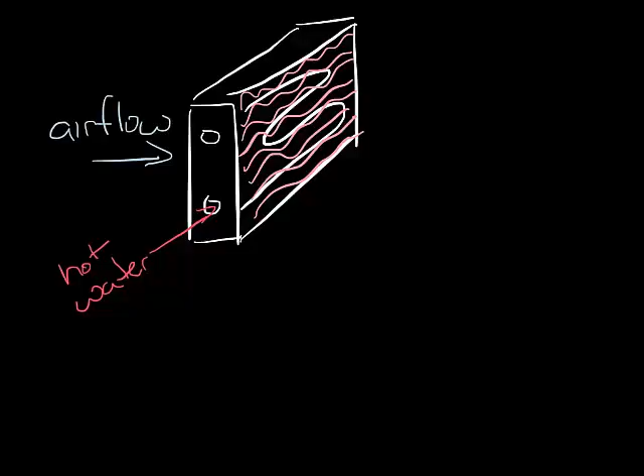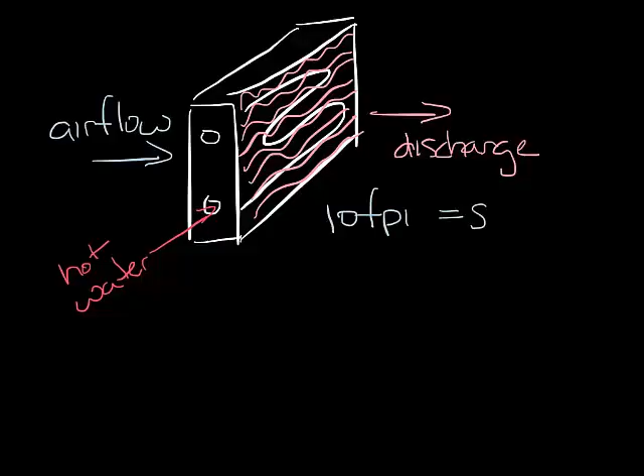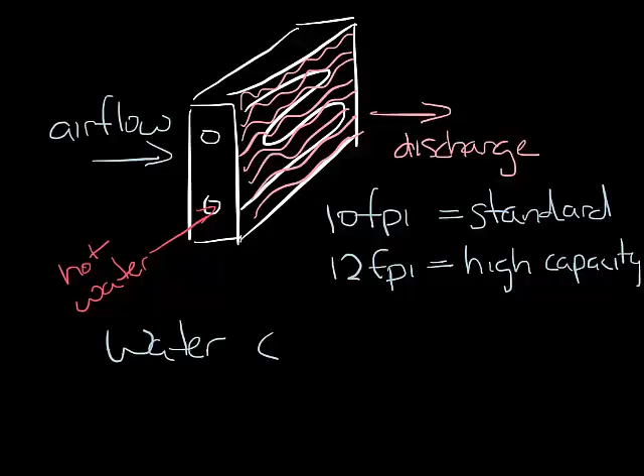Standard hot water coils have 10 fins per inch, but you can also get high capacity coils that are 12 fins per inch. One thing to remember, water coils will add pressure drop to your VAV boxes.

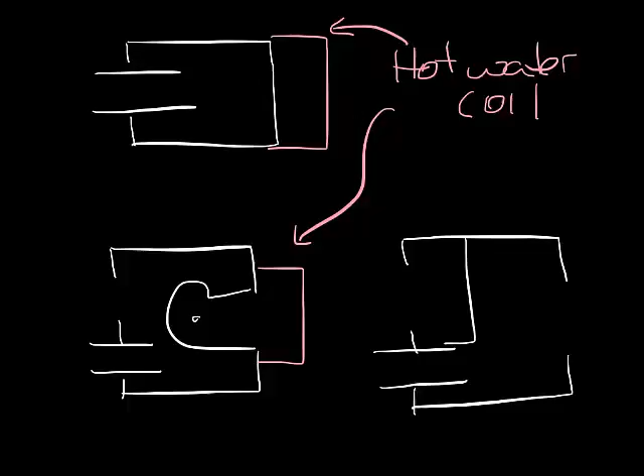Okay, so let's move this out of the way and talk about where water coils are mounted. Water coils are typically mounted on the discharge of a single duct box or a series fan powered box. On a parallel fan powered box, they're often mounted on the induced air inlet so that you don't have a pressure drop across the box when you are not in heating mode.

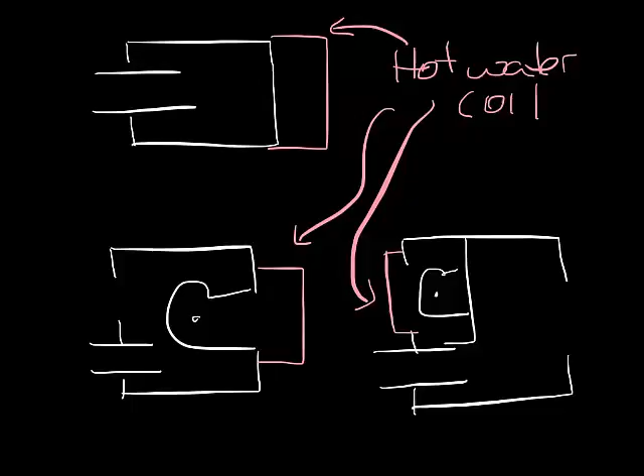Okay, so let's move this out of the way a little bit. When you have a call for heat, the controller on the VAV box modulates a valve that controls the water flow to the water coil, and this is how you control the heat in the zone.

Electric heaters are almost always mounted on the discharge of the box and usually have an air-proving switch because you have to have airflow across the elements or the elements will burn up. Okay, so let's move this out of the way. There are two types of electric heater, staged and SCR.

Staged heat turns the heat on in stages, usually 1, 2, or 3 stages. A single stage heater turns all the heat on at the same time when the thermostat calls for heat in the space. A two-stage heater turns half the heat on in the first stage, and if that doesn't provide enough heat to make the space comfortable, it turns on the second stage. And a three-stage heater does the same thing, but in 3 equal stages of heat.

So let's look at the operation of a staged heater. Say you have a 10 kW heater that's 2 stages, so each are 5 kW. So the first stage gives you 5 kW of heat, the second stage gives you 10 kW of heat, and say your set point is 75 degrees. So let's look at how it operates over the course of a day.

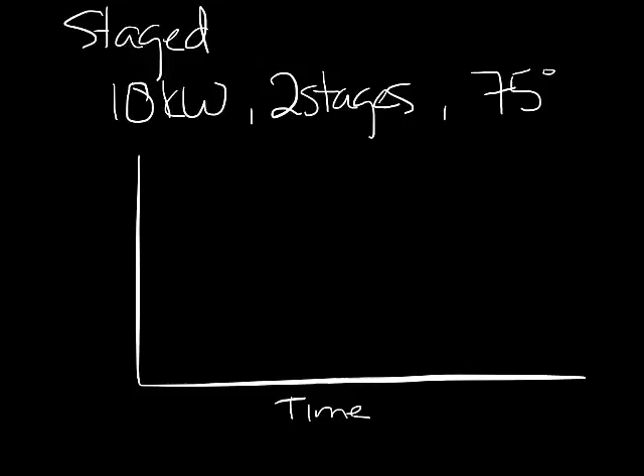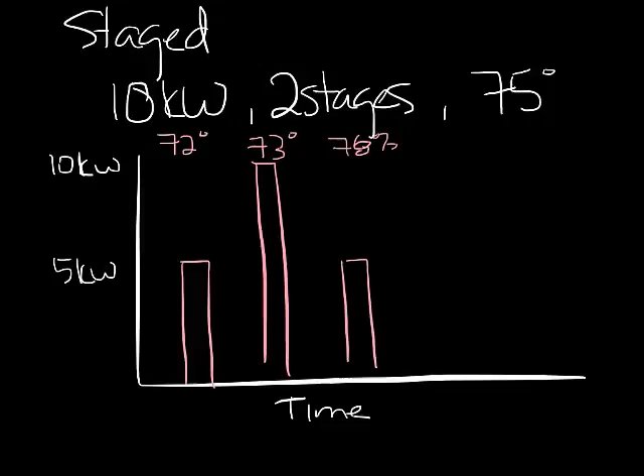So when you come in the morning, your zone is 72, you energize the first stage of heat, which gives you 5 kW, and after a while it's still not comfortable, say it gets to 73 degrees. So you turn on the second stage and now you have 10 kW of heat on. And then it gets too warm, so now it's, say, 78 degrees. So it turns off that second stage of heat and you have 5 kW, but then it gets too cold again, so it wants to turn the heat back on. You turn the second stage on, now it's too warm, and you turn the second stage off, and so on.

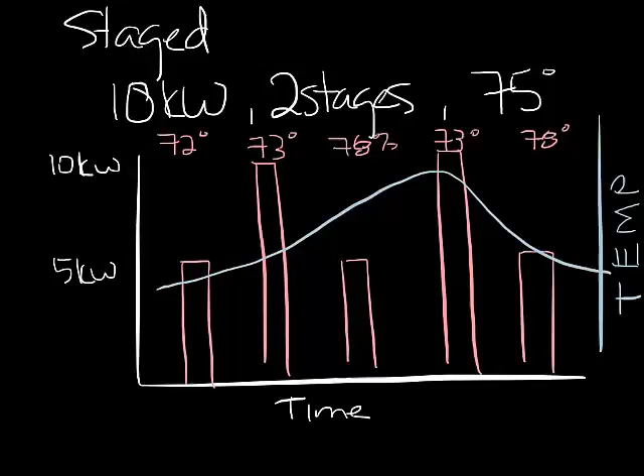If you look at the temperature throughout the space, you go from being a little cold to a little warm to a little cold on and off all day long. And that is the challenge to staged electric heat, because the temperature in the space is going up and down as the system tries to maintain the 75 degrees, but you're too warm sometimes and too cold at others.

So let's move this out of the way so we can talk about SCR electric heat. SCR stands for Silicon Controlled Rectifier. SCR heaters actually don't use SCRs anymore. They actually use SSRs, solid state relays, but the name has stuck around, so we still call them SCR heaters.

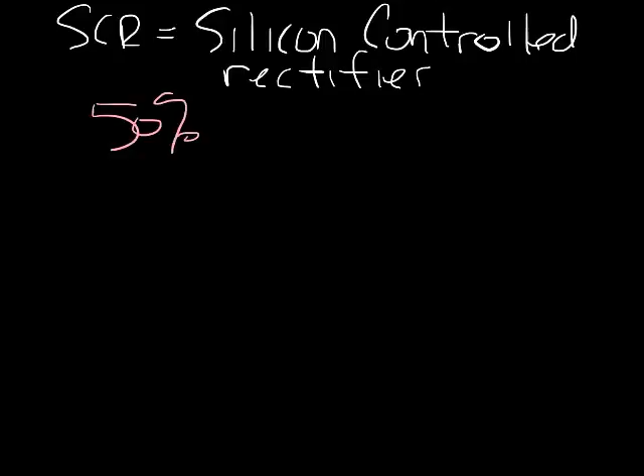The SCR heater solves the problem of overheating and underheating by matching the heat requirement of the space. The SCR heater pulses the heater on and off over a set period of time, usually a couple seconds, to provide the exact amount of heat needed. For instance, if 50% heat is needed to meet the set point, then the heater will pulse on for half the duration and off the other half. So for a 2-second duration, that would be 1 second on and 1 second off.

So let's go back to our 10 kW heater. So instead of having 5 kW on or 10 kW on, you would have the equivalent of 7.5 kW heat output, which would match the needs of the space. And you don't have the overheating or overcooling in the space that you get with a staged heater. So that covers the different types of VAV box reheat.